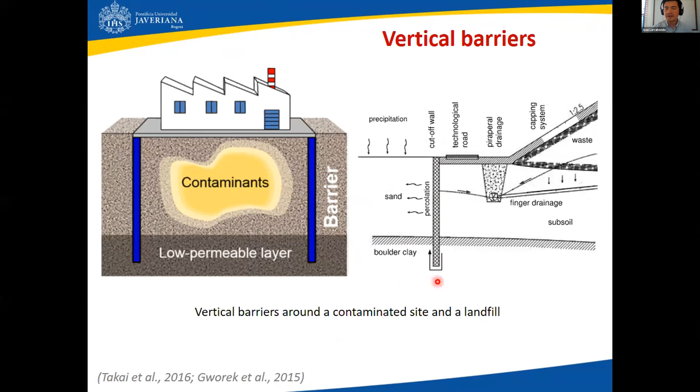On the right-hand side, you're looking at a schematic of a cutoff wall for remediation in the perimeter of an existing landfill, from the publications shown here. Basically, these cutoff walls have the purpose I just mentioned: either to encapsulate or treat the contaminants and the contaminant plumes.

Out of the many vertical barriers, you're seeing a list of the most common or most studied ones. Some are self-hardening, some are not. We have soil bentonite backfill vertical barriers, or slurry trench cutoff walls, which are the most widely used in the US, for example. But we also have soil cement bentonite backfill barriers, cement bentonite slurry walls, slag-cement-bentonite, or slag-CB, slurry trench cutoff walls, fly ash cement bentonite slurries, high density polyethylene geomembrane in the field of geosynthetics, plastic concrete, curtain grouting, and so on.

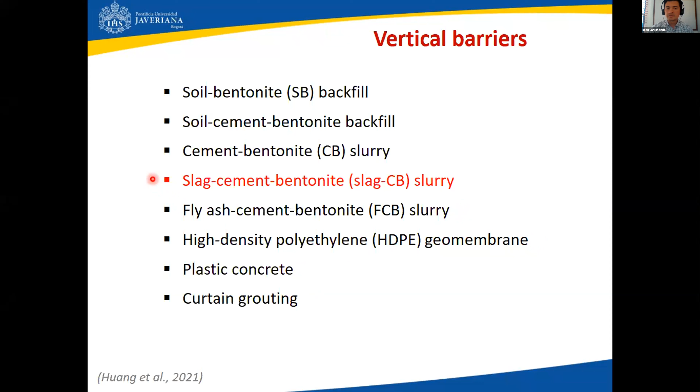So for today's presentation, I'm going to focus mostly on slag-CB slurry trench cutoff walls.

As far as the history and development of these systems, particularly slurry trench cutoff walls, this timeline shows that back in the 1940s, the first field tests were performed in the USA and Europe. Not until the late 1940s were the first cutoff walls constructed and placed in operation, in Italy and the US. Later, maybe 10 years later in Europe, the slurry trench technique was successfully applied for structural element installation, and that has continued to this day.

In 1968 or so, the original World Trade Center slurry wall in New York City was completed using the slurry trench cutoff wall, or slurry trench, technique. It is not a slurry wall, but a concrete wall constructed using the slurry wall technique, and it contains the waters from the Hudson River out of the excavation of the World Trade Center.

In the 1970s and 80s, the use of these systems was expanded for environmental containment. From the 1990s to this day, it's a widely accepted technique for geoenvironmental cutoffs and also structural elements.

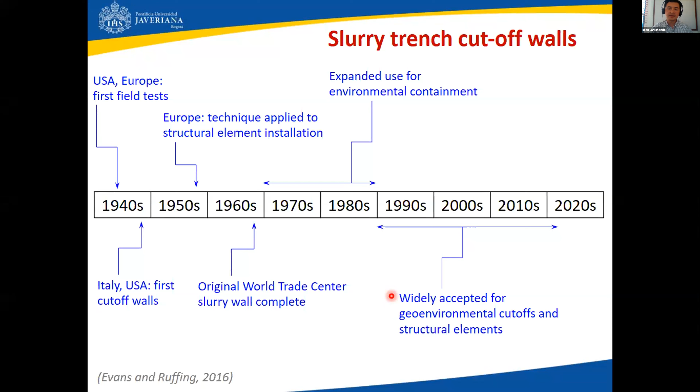If we take the US and the United Kingdom as a benchmark for comparison, this table compares the practices and outcomes in both places. In the US, the most widely used slurry trench cutoff wall is the soil bentonite one, SB. However, in the UK, by far, the most widely used is slag-CB cutoffs.

The construction stages are different: two phases in the US practice versus one phase in slag-CB walls, but the excavation equipment is pretty much the same, backhoe and clamshell. The depths are similar, typically less than 20 meters, but the width is a bit larger in soil bentonite, about 75 centimeters, whereas slag-CB is typically 60 centimeters. Also, the lengths of soil bentonite walls are typically longer, more than 1 kilometer, than slag-CB systems.

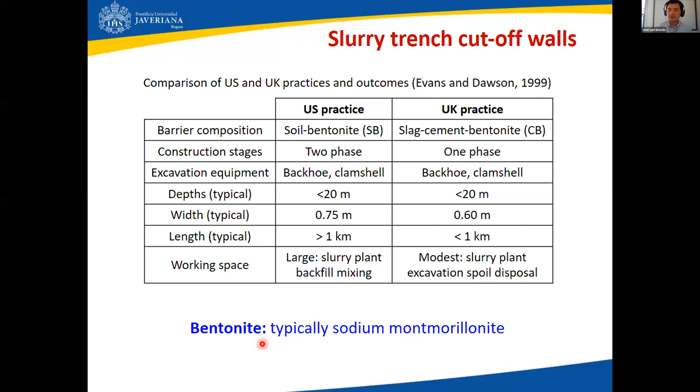Another major difference in construction logistics is that the working space required is typically larger for soil bentonite slurry trench cutoffs, because they use a slurry plant for backfill mixing, whereas for slag-CB systems it's rather modest, since they use a slurry plant for excavation and spoil disposal. In both cases, though, the bentonite is typically sodium montmorillonite expansive soil.

What you're looking at here for soil bentonite cutoffs is a schematic of the typical construction process. You have an excavator backhoe digging the trench to a certain depth. At the same time, a slurry prepared with bentonite and water, typically about 5% bentonite, fills the trench to avoid collapse of the trench and the excavation itself.

It's permitted to settle for some time. Meanwhile, a mixing bulldozer dumps in a controlled, diagonal fashion the soil bentonite backfill, as you can see here, until the whole trench is filled. Of course, there's a quality control process in the middle, and the soil bentonite cutoff can start operating.

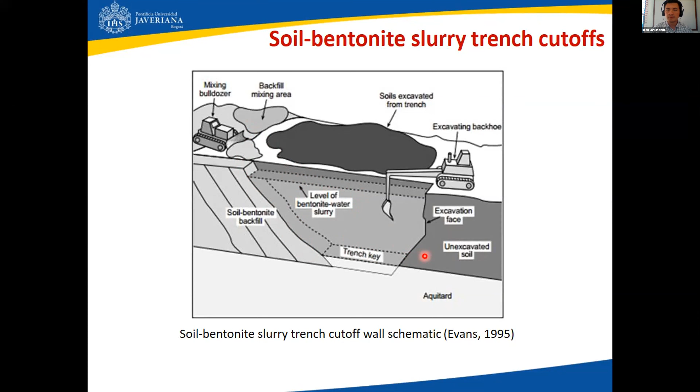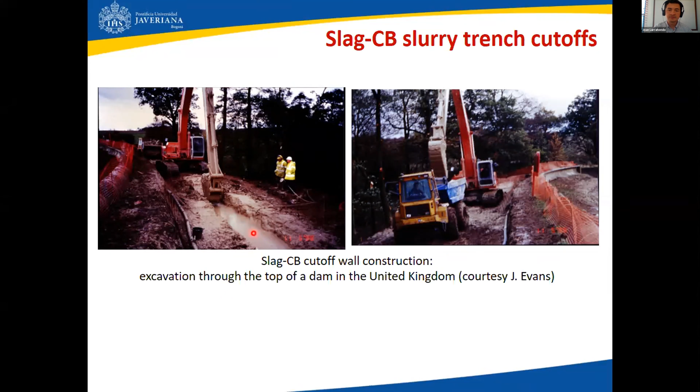As far as slag-cement-bentonite slurry trench construction for cutoffs, these photos, courtesy of Jeff Evans, are from the late 90s in the United Kingdom. This is an excavation through the top of a dam at that location, showing the process of digging the excavation and allowing the slurry to prevent collapse and to set in the initial stages of construction.

On the left-hand side is a close-up of the hardened slag CB material at the top of the wall. You can see a deep blue coloration due to the manganese in the slag. On the right-hand side is a slurry mixing plant, which is rather small in size for this type of construction.

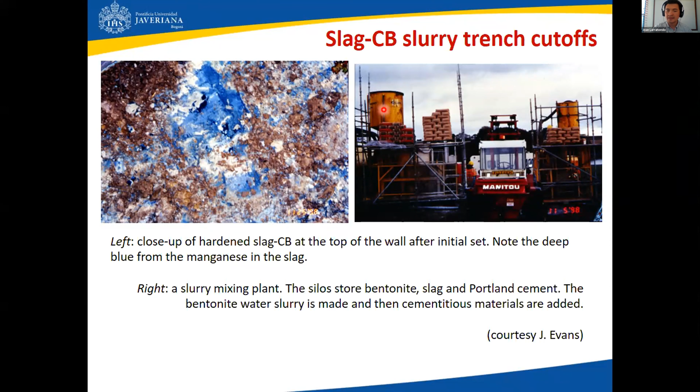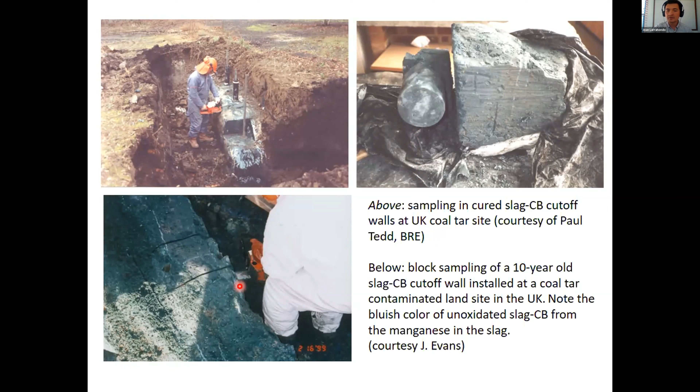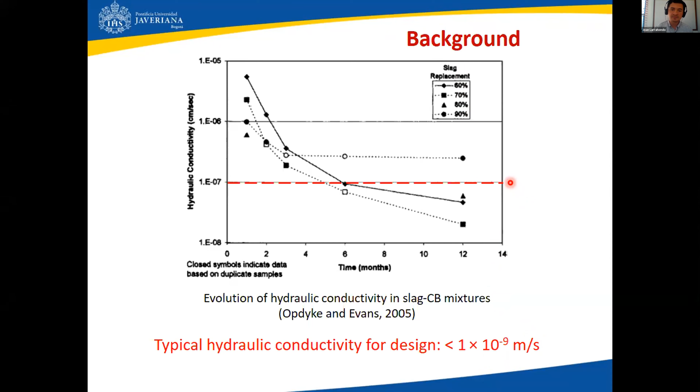Now, there are a couple of numbers I want you to keep in mind during this presentation, that are normally very important for these types of mixes, but we do not really quantify or account for them all the time in practice. First, the water to cement ratio. You may recall from materials or structural engineering that concrete and mortar are materials with rather low water to cement ratios. Concrete may be in the order of 0.5 or so. Mortar has a wider range, but also not too far from the low range values.

However, when we quantify that water to cementitious material ratio, including both the Portland cement and the slag, for slag CB mixtures we have a much higher number, an order of magnitude higher, because of the proportions normally used during field construction. It's in the order of 6 to 6.3 water to cementitious ratio.

Now, the second number I want you to look at is the ratio of cementitious mass, that is either Portland cement or Portland and slag, divided by the dry soil mass, that is bentonite. These numbers are very important because there is a lot of evidence, studies and research from the field of expansive soil stabilization, swelling soil stabilization, for example with lime or with cement, slag, or slag cement. These numbers are in the order of 4 to 20% overall for this type of expansive soil stabilization.

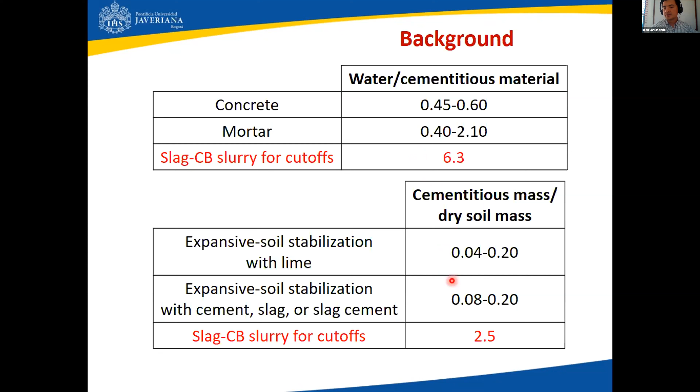I'm going to be talking about these types of methods to support the discussion of my research. So if we compare that with what happens in slag CB mixtures, we also have very large numbers, in the order of 2.5, also roughly one order of magnitude higher. I wanted to keep these two numbers in mind for the remainder of the discussion, because they are going to help us understand the data I'm going to present later.

Cement has a major chemical phase called tricalcium silicate. By the way, in these reactions I'm not presenting the typical elements or stoichiometry with chemical elements per se, but I'm using cement chemistry notation — the language that cement chemists use, with shorter terms for each component. So this C is not carbon; C means calcium oxide, S is silicon oxide, and H is water in this notation, and that's the way cement chemists talk.

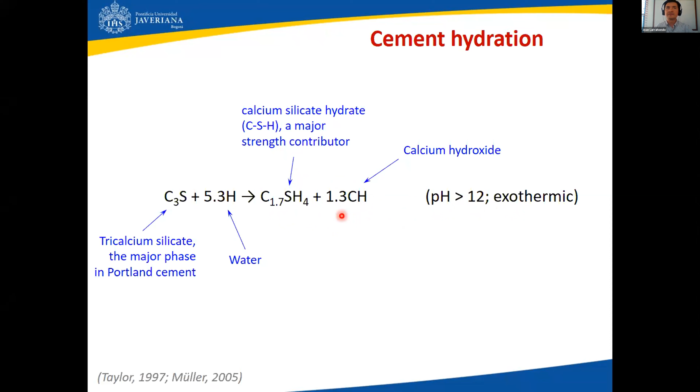But equally important, we have also calcium hydroxide. As you know, calcium hydroxide delivers very alkaline conditions, very high pHs, and this reaction overall is exothermic. So in summary, the hydration of cement delivers pretty aggressive conditions in the environment where it takes place.

A second reaction I want to look at is carbonation. When we have the abundance of calcium from the dissolution of calcium hydroxide and CSH, which takes place during cement hydration, this calcium combines with atmospheric CO2, and we know this reaction delivers calcium carbonate, the mineral calcium carbonate. This is well known in the cement chemistry literature.

The interesting thing is that in CB slurry systems, or even in slag-CB slurry systems, which are being constructed at a certain depth, say 15 meters below ground surface, there is probably another source of carbonate, which is bicarbonate ions dissolved in groundwater. So these processes are, in a way, plausible in a slag-CB cutoff.

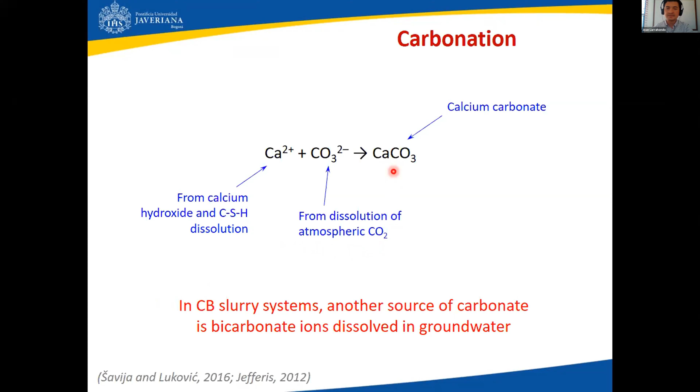And finally, I just wanted to mention pozzolanic reactions. I'm sure you are familiar with them as well. You may remember that when calcium hydroxide combines with a pozzolanic material, which is typically from volcanic origin or calcination, for example metakaolin, even fly ash has pozzolanic properties—some fly ashes have pozzolanic properties. Those are materials that are high in silica but typically low in calcium.

They are going to produce at ambient temperature a calcium silicate hydrate, and this material has cementing properties. That's why pozzolanic materials are interesting and useful, because from a material that does not have cementing properties, with reaction with calcium hydroxide, you get a material with cementing properties.

Now, if the pozzolanic material is high in alumina as well, you also typically get calcium aluminate hydrates, both of them at ambient temperatures. What is interesting is that the field of study of pozzolanic reactions is a very widely known and well-studied field.

It's widely known and well-studied in lime stabilization or even cement stabilization of swelling soils. However, these principles have not been very well or deeply studied for the field of contaminant barriers. So that's where we are looking right now in this present study.

I just want to mention that if certain phases like sulfates, carbonates, or chlorides are present, these same reactions may produce ettringite. And this mineral, ettringite, is a complicated mineral for engineering applications because it also has swelling properties as well.

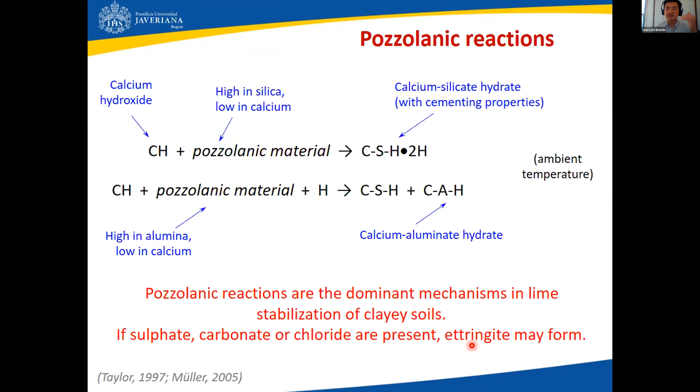Now, as final background, it turns out that back in the 1960s, Jim Mitchell and other collaborators, and also many other researchers, have looked at the mineralogy of stabilization of clay soils or swelling soils with either cement or lime or other cementitious materials.

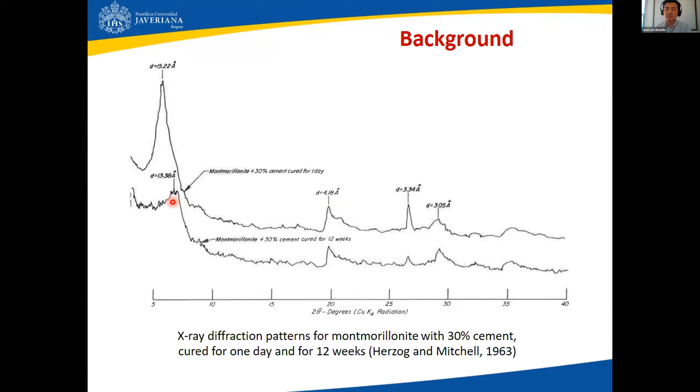This is the band that represents montmorillonite in a random powder mount X-ray diffraction pattern. So what this is telling us is that there is a significant mineralogical change within the structure of the montmorillonite mineral during the 3-month curing period. I want you to keep that in mind for the discussion that is coming up.

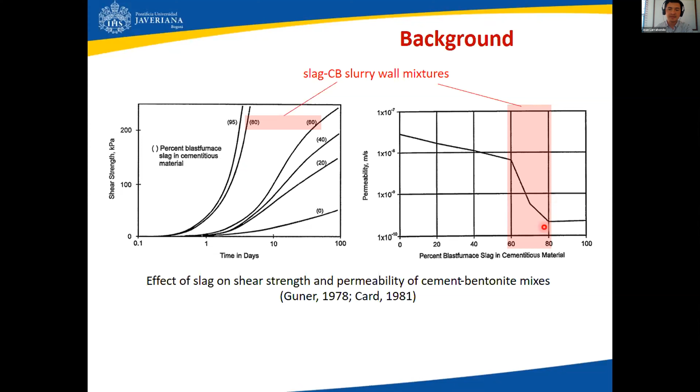As far as properties, and to close this background, shear strength and permeability are affected by slag content. This granulated ground blast furnace slag is used as a replacement or partial replacement cementitious material in very large proportions, typically from 60 to 80% replacement within the cementitious component in slag-CB mixtures. You can see there are typically important changes and increases in strength, or at least accelerated strength, and also significant changes in hydraulic conductivity due to the presence of an important amount of slag within the cementing component of the mixture.

All right, so putting all this in perspective, we decided to cast a research question: if we have a slag cement slurry wall, with the mixture in proportions for field construction, what is the evolution and what is the importance of all these concepts in slag-CB systems?

We were interested in what was the fate of the bentonite—whether it's really contributing in the long term to hydraulic conductivity and other properties related to contaminant encapsulation. This was our driving question for this research.

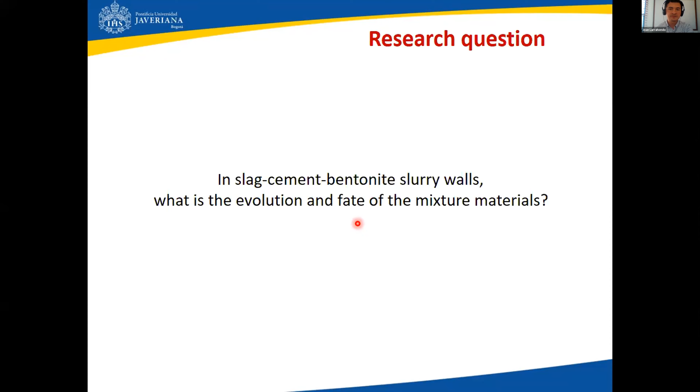On the left column here is the mixture representative of field construction in typical slag-CB cutoff projects. On the right is a second mixture prepared for validation or confirmation of the first—a high bentonite content spiked mixture, with proportions shown here.

For the field representative mixture, typical of slag-CB wall construction, the slurry has a 6% bentonite content, and the amount of slag replacement within the cementitious components is on the order of 80%, with the remaining 20% being Portland cement.

Comparing side by side with the high bentonite mixture: the composition per total mass is just 5% bentonite, since most of it is water, and 13% cementitious components. But per dry mass, bentonite is 29% and cementitious material is significantly higher at 71%.

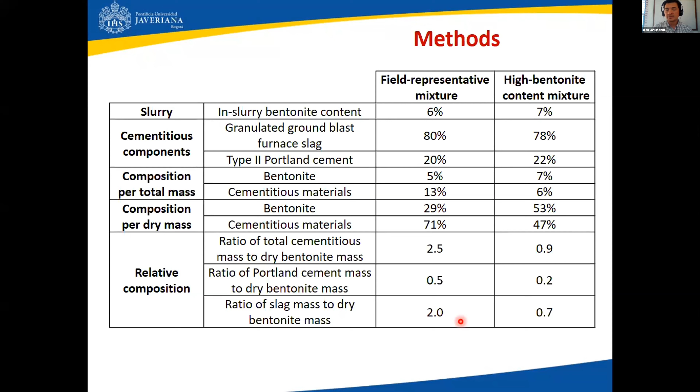First, we simulated in the lab the process of slurry preparation. Here is the bentonite-water slurry mixture, mixed in a blender. After overnight, or about 24-hour setting of the slurry, the material was mixed with cement and slag, then transferred into plastic molds, which were cured at 100% relative humidity for up to 3 months.

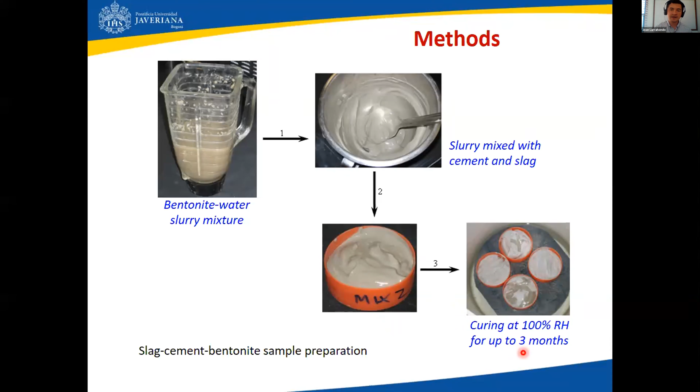With some frequency within that time frame, we tested for scanning electron microscope images and X-ray diffraction patterns in random mount fashion.

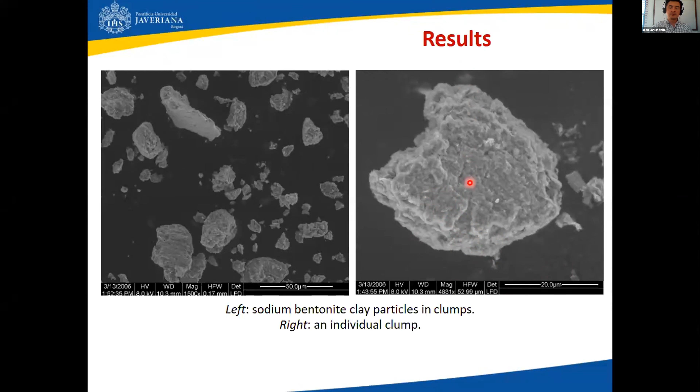Here are the results. In both photos, what you see when you get bentonite from a commercial provider are not individual particles, but aggregations of sodium bentonite, or montmorillonite clay particles, in what we call clumps. These aggregations, seen on the right-hand figure, are more silt size—with a scale bar of 20 microns across—so you cannot see the individual montmorillonite particles; they are aggregated in this fashion.

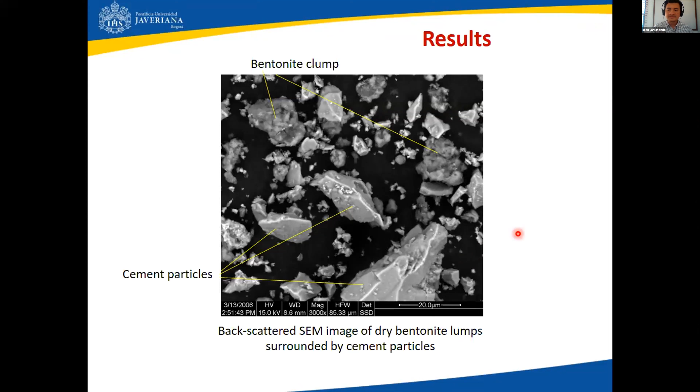Another interesting thing in these photos is the relative size of bentonite clumps to cement particles. The Portland cement particles are actually silt size as well, and much larger typically than individual clay particles, and even larger than the bentonite aggregations. We believe this has implications for the chemical reactions that take place upon hydration, because the cement particles being larger than the bentonite and clay particle units, the reactions are probably heterogeneous. That doesn't mean reactions don't take place—they do—but not necessarily like very fine powders combining and hydrating with one another. This is important information to keep in mind.

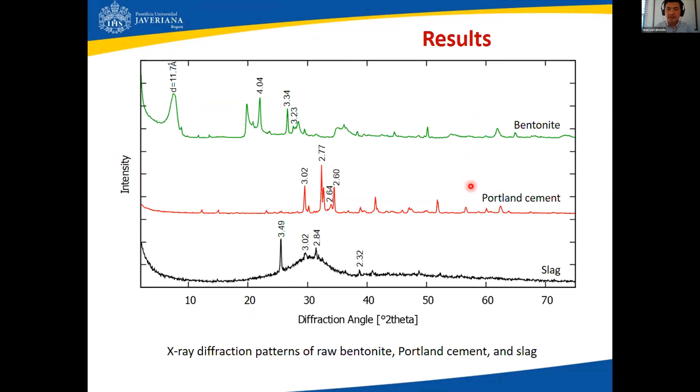As for X-ray diffraction patterns, this is the typical representation of X-ray diffraction data: on the x-axis, diffraction angle in 2 theta fashion, and on the y-axis, intensity in arbitrary units. You can see three patterns here—one for the individual raw bentonite as received from the commercial provider, one for Portland cement, and one for slag, the replacement cementitious material. I want you to look at the main peaks that allow us to identify the main minerals present here.

For the bentonite, we confirmed that it was a monovalent sodium montmorillonite, and that has to do with this main peak that you can get from random powder X-ray diffraction testing. It's in the order of 12 angstroms or so, the D spacing I'm talking about, and that gives us positive identification of the bentonite.

Also, in Portland cement, as expected, we found tricalcium silicate, which also has different names depending on the source you look at, particularly whether or not it's a natural or manufactured product.

And finally, the slag. The slag, for the most part, is amorphous, and that can be evidenced here with this wide hump in the X-ray diffraction signal, which has to do with a lot of glass being present in this material.

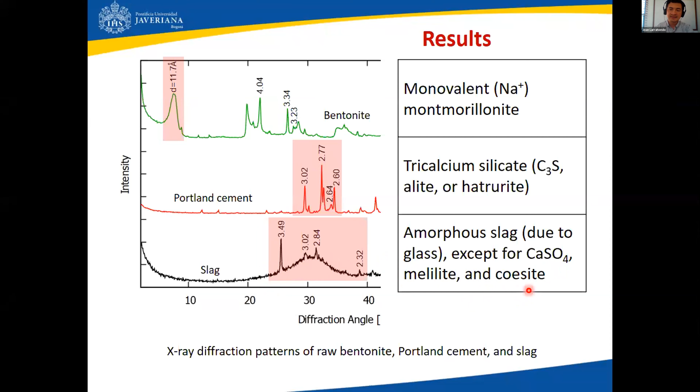However, we also found some peaks that are representative of other materials that have been reported in the literature as well in slags: calcium sulfate, melilite, and coesite, some particular minerals that are present typically in slag materials.

Now, what you're looking at are the results of the field representative slag-cement-bentonite mixture that we tested. So what you see here are 5 stacked patterns, one for each time within a window of 3 months. We have data for 0 days, that is pre-hydration, and then data for 1 day, 3 day, 18 day, and 91 day hydration periods, curing under 100% relative humidity conditions. Of course there is a lot of data here, and I'm going to break it down for you in just a second.

For now, what I want you to look at first is the U peak. I labeled it U for lack of another letter to use here. That is an artifact of the testing, which is aluminum, because the sample holders that held the actual samples were made of this metal. This peak is very sharp and very high, but it's not significant for this study.

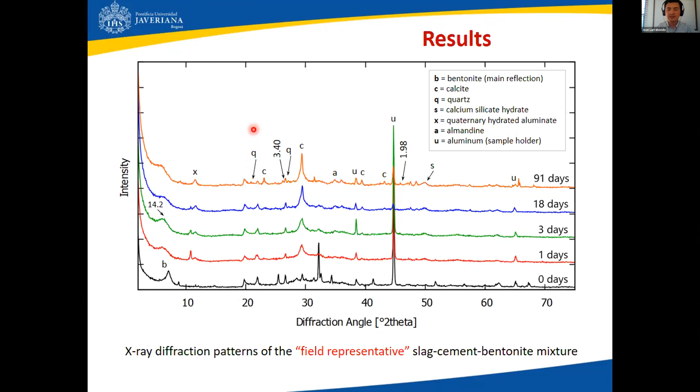Second, the Q peak, which is quartz. Interestingly, in real field applications, when the slurry wall is being constructed, a lot of sand or perhaps other soils gets into the mixture and into the trench, as a cross-contamination material from the construction process. However, for this particular study, we did not intentionally add sand or other soil, just to prevent misinterpretation of the data. However, you can still see a very tiny little peak of quartz here that remains in most of the X-ray diffraction patterns.

Again, there's a lot of data here, I'm going to break it down for you in a moment. This is the stacked pattern of the high bentonite content mixture, the spiked mixture with high bentonite content. You can see here again the aluminum holder signal and the quartz signal as well.

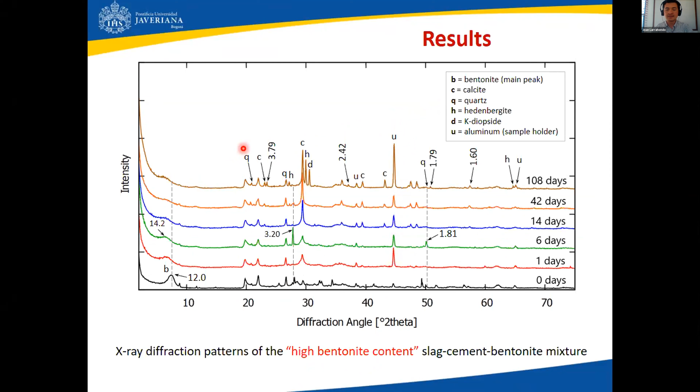So, as promised, I'm going to explain the data separately to identify the different minerals that we found. First of all, in both mixtures, the field representative and the spiked mixture, we found sodium montmorillonite in the very first state, the dry state at 0 days.

However, we confirmed the findings of Mitchell and many other researchers later. You can see here that during the first days, fairly rapid during the hydration process with slag and cement, the peak of bentonite is no longer a peak; it becomes a hump, and in fact it tends to shift a little bit to the left-hand side. So what we confirm here is clay mineral destructuring that has to do, we believe, with dissolution in the aggressive environment promoted by calcium hydroxide and the exothermic environment during cement hydration mainly.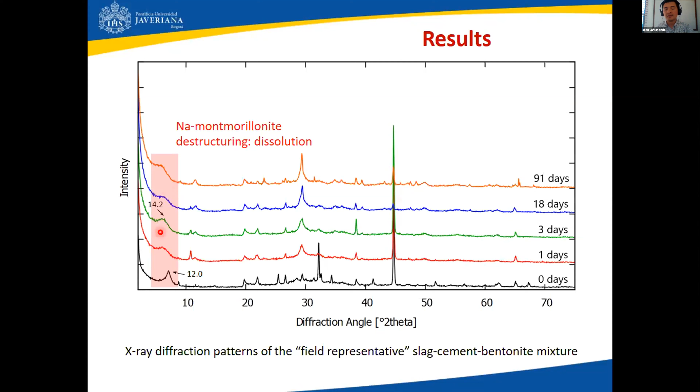So what you can see here also is that beyond perhaps the 18th day, you can argue that you no longer really have montmorillonite. The slight shift in the peak may have to do, or actually we believe it has to do, with cation exchange that is taking place, because at that pH, the calcium oxide or calcium hydroxide form tends to replace, or transiently replace, the sodium by calcium in this structure.

These findings were also confirmed in the high bentonite content sample. You can see here again the peak, and again the fading of the peak as time moves forward towards 3 months, basically.

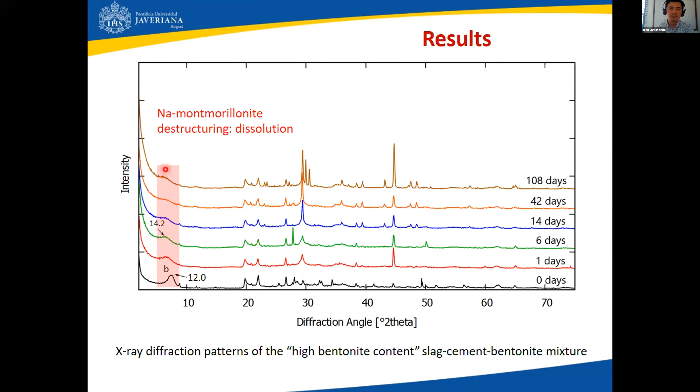So the key points to take from this first point of bentonite dissolution, and perhaps the implications it also has, is that the very high ratio of cementitious mass to bentonite mass I mentioned earlier, about 2.5 for slag CB systems, is typical for these mixes, and promotes rapid bentonite dissolution. That has to do with a very chemically aggressive environment taking place there.

Second, while bentonite plays a key role in maintaining low hydraulic conductivity in a soil bentonite wall, as I said, that's the main practice in the US, for example, in slag CB walls, or even CB walls probably, the role of bentonite is largely short-term. You can see that within a matter of days the bentonite structure basically fades away.

And third, in the long run, we believe that the slurry wall's hydraulic conductivity is a result rather of the hydrated cementitious structure, that is the cement hydration products and other products I'm showing in just a second, not the bentonite, because the bentonite disappears rapidly with time.

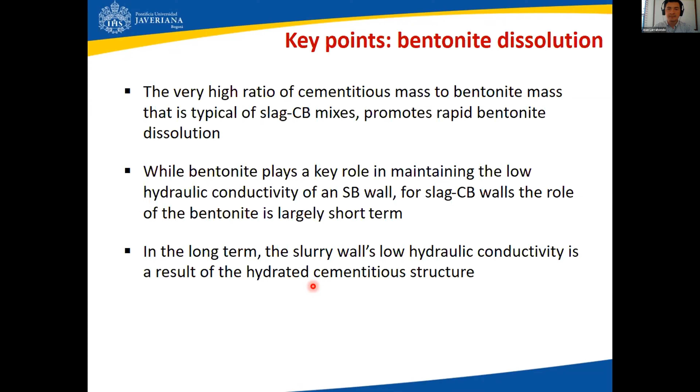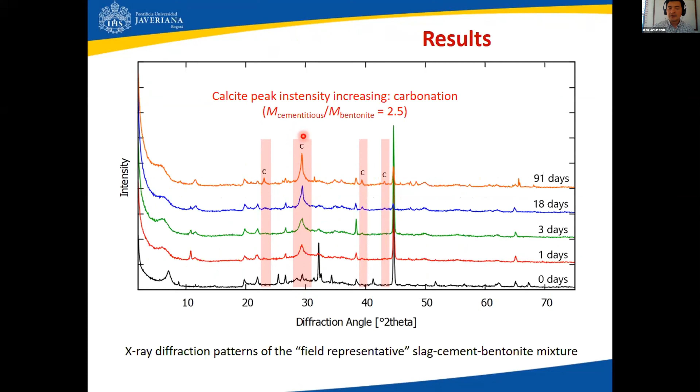Now, if we look at the same patterns we saw before, but with a different mineral in mind, that is calcite, calcium carbonate specifically, we confirmed the presence and enhancement of calcite over time. You can see here clearly that from 0 days up to 3 months, basically you get sharper and very distinct calcite peaks.

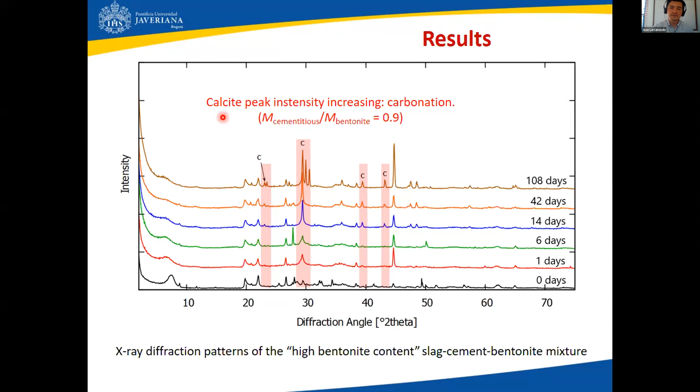This happened not only in the field representative sample, but also in the spiked high bentonite sample. So what we confirm here is carbonation. We believe carbonation is taking place because CO2 from the atmosphere is being absorbed by the mixture, and the calcium specifically reacts with it to produce calcite. In fact, no other calcium carbonate polymorphs were found in this study, only calcite.

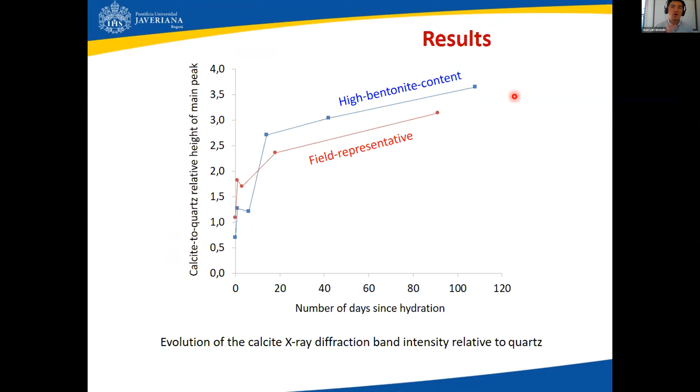The same data can be plotted in this chart, where the x-axis shows the number of days, up to 3 months since hydration, and the y-axis shows the relative height of the main peak from the X-ray diffraction patterns, comparing calcite divided by quartz, since quartz was basically constant during testing. Except for a small decreasing trend we haven't explained, we see a general trend of increasing calcite intensity, which typically reflects either crystallinity or content. So we believe carbonation is taking place.

So the main key points and implications of this are that due to the formation and enhancement of calcite, barrier effectiveness may be compromised if the target contaminant is acidic in nature. We all know calcite is vulnerable to low pH, acidic conditions. So for example, if this slag CB wall is intended to encapsulate a contaminant plume from an acid mine source, we may have problems with calcite performance, or rather wall performance, in the long run.

Also, we believe carbonation may be hindered under field conditions. However, this is something we are starting to explore, and I'm advising a new PhD student who intends to look into these processes. The problem is that atmospheric CO2 may be scarcely available under real construction conditions. However, we have some evidence that bicarbonate ions may be a good enough source for the development of calcite.

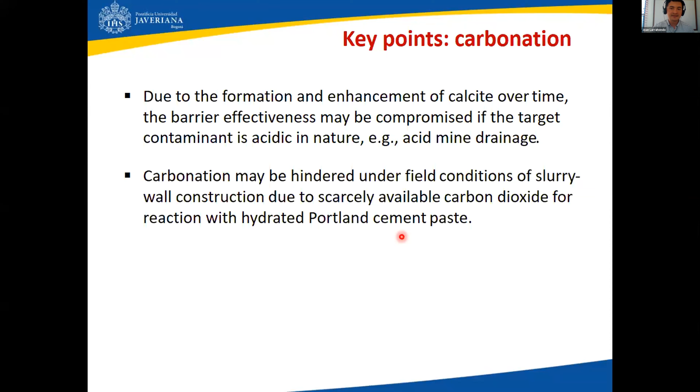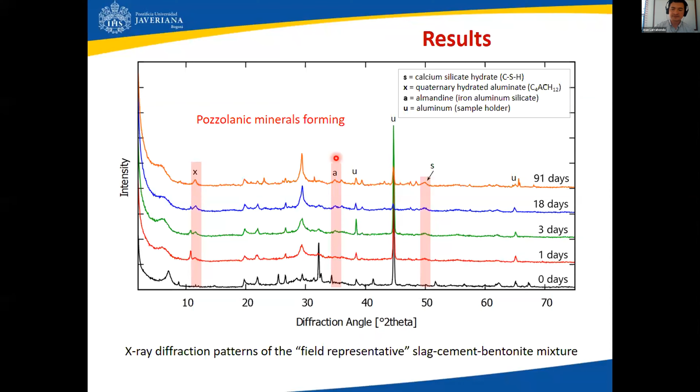There are very sharp peaks at 3 months, and perhaps there would be sharper peaks if this study had been performed over a longer period. However, the minerals we confirm are different, distinct from those in the field representative sample. We have hedenbergite and K-diopside, both calcium iron silicate.

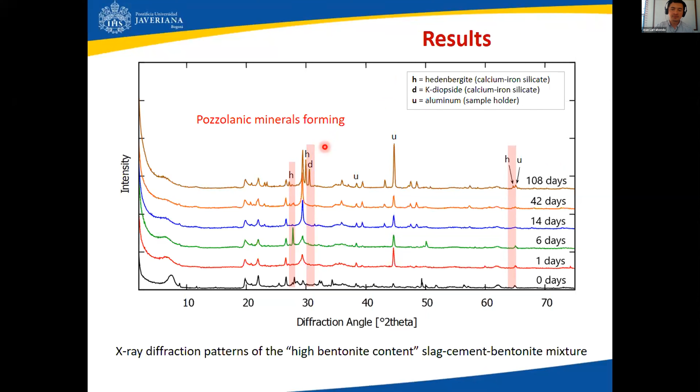So the main implications and key points to take home from this, probably the most important statement of this presentation, is that bentonite clay minerals may actually be thought of as pozzolanic precursors required to enhance cement hydrate formations. These may have implications, and I'm saying may because this is basically a new field of study, and hopefully new research will be done in this area in coming years.

These pozzolanic hydrates are known to improve, or may possibly improve, some of the barrier's contaminant sorption properties, which, as I said before, can no longer be attributed to the bentonite because the bentonite disappears quickly due to the reasons I explained before.

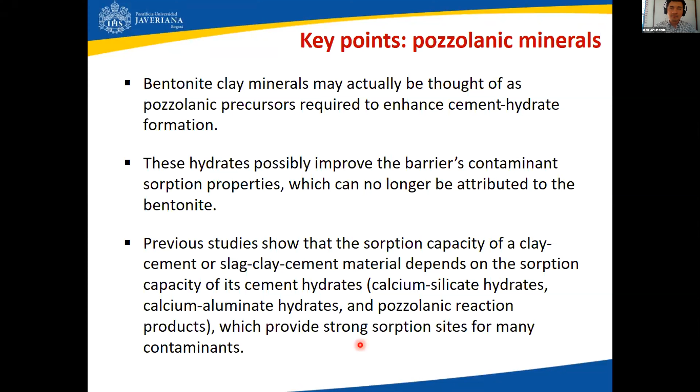What we do know, though, is that the field of lime or cement stabilization of swelling soils has told us that the sorption capacity of a clay cement or slag clay cement material depends on the sorption capacity of the cement hydrates. Those are the hydrates I'm talking about when I mention pozzolanic products. These materials or minerals provide strong sorption sites for many contaminants, and this is a widely unexplored field of research we are looking forward to tackling in the next few years.

Overall, the implications of all this are that the well-known mechanisms of bentonite volume change in response to changes in pore fluid chemistry, the diffuse double layer theory, the Debye-Hückel double layer thickness, and so on, are excellent approaches for soil bentonite systems.

However, they are not applicable for slag-CB systems because the bentonite fades quickly over time. Having said that, we learned that while the fate of bentonite is in the pozzolanic minerals form, bentonite of course is a critical ingredient. It's an instrumental variable required for slurry workability during slag-CB construction, and it should continue to be used in the upcoming decades.

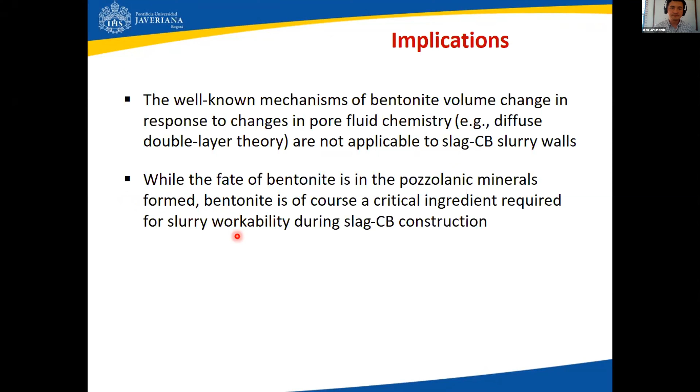Also, browsing the literature on these topics, we found that there is definitely an overemphasis in previous studies on the role of hydraulic conductivity, which is of course a critical parameter. However, for actual vertical barrier performance, it is not the only parameter that takes place. Little research, in fact, has been performed on diffusion, sorption, reactive transport properties, and so on.

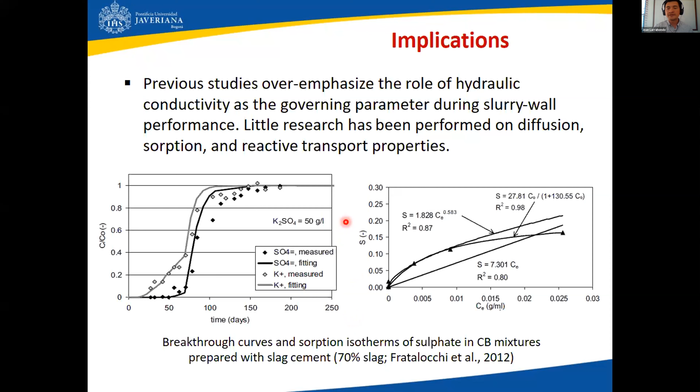Perhaps reactive transport has been studied more in reactive barriers, but not in encapsulation barriers. What you're looking at here at the bottom are one of the few studies we could find, from Fratalocchi and others in Italy, as far as breakthrough curves, sorption properties, and so on, of cement-bentonite mixtures prepared with slag cement. With this data, you can calculate or estimate diffusion coefficients and sorption parameters as well.

So in conclusion, to us, the long-term hydraulic effectiveness and performance of a slag-CB barrier is not due to the presence of the original bentonite. However, the bentonite is of course very important for construction purposes, because the bentonite gradually destructures and dissolves over time.

Having said that, we believe that the traditionally accepted concepts of compatibility that are normally applicable for soil bentonite barriers are not applicable to slag-CB barriers, or in fact to cement-bentonite barriers, because the bentonite does not exist in a fully hydrated slag-CB wall. To us, a possible implication of the calcite presence is that it may render the barrier vulnerable or susceptible to chemical degradation if the contaminants are acidic.

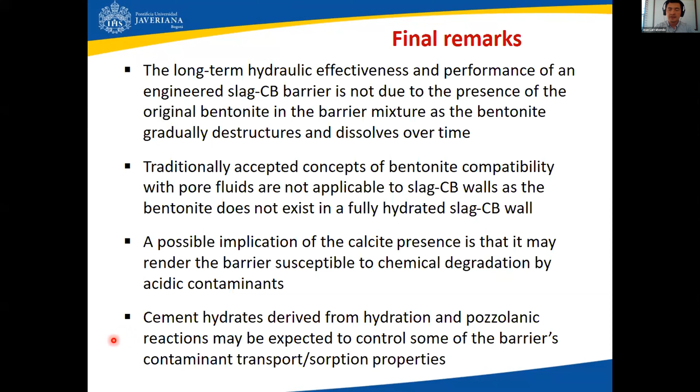And finally, the cement hydrates derived from hydration and pozzolanic reactions, we believe, may be expected to control the barrier's long-term contaminant transport and sorption properties. This particular point is underexplored in research, so we hope to start tackling these problems in some time. Thank you so much.